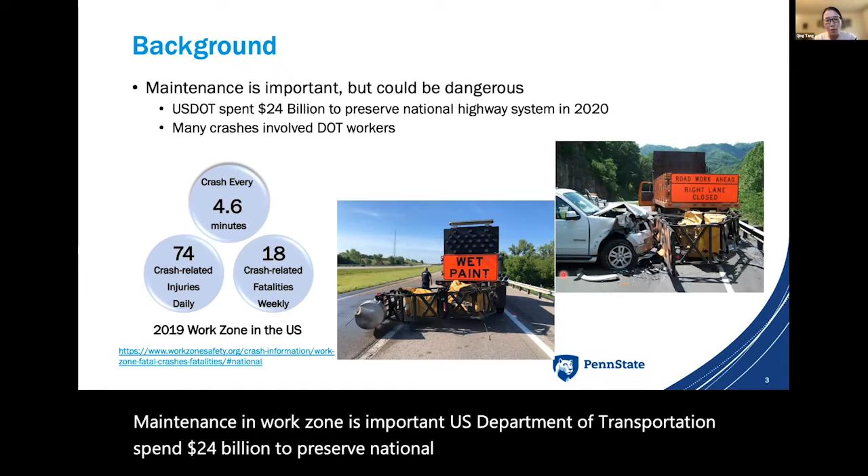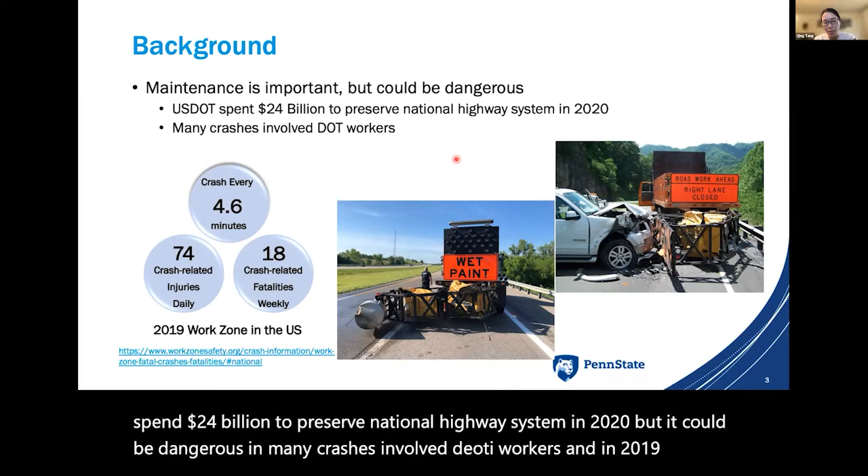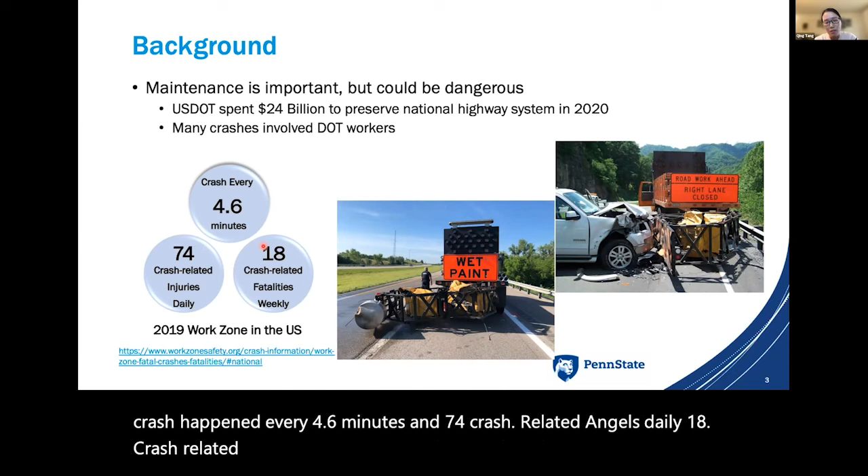Maintenance in work zones is important. The U.S. Department of Transportation spent $24 billion to preserve the national highway system in 2020, but it could be dangerous. Many crashes involved DOT workers, and in 2019, a crash happened every 4.6 minutes, with 74 crash-related injuries daily and 18 crash-related fatalities weekly. So how do we protect the lives of DOT workers?

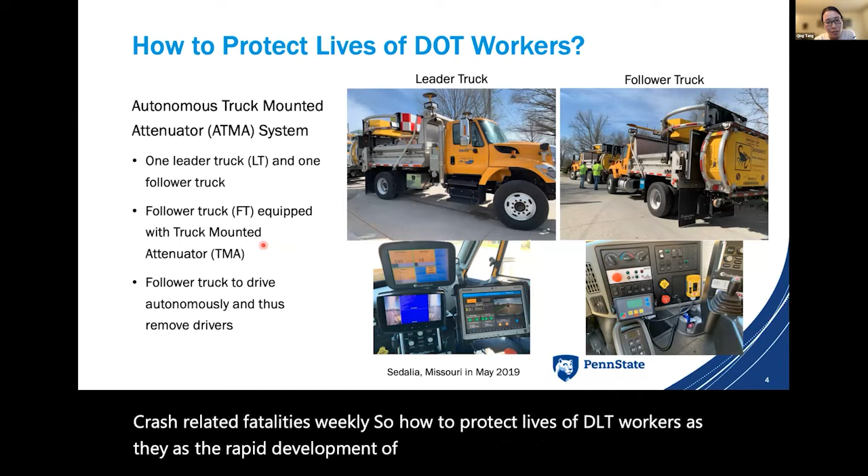With the rapid development of CAV technologies, many state Departments of Transportation tend to use the autonomous truck-mounted attenuator system to reduce fatalities of workers in work zones.

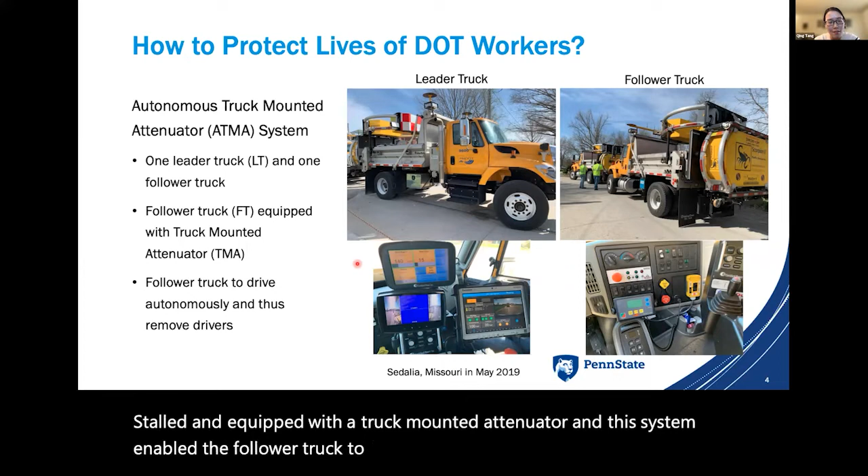One specific technology named autonomous truck-mounted attenuator system is being tested and deployed in several states. The system includes one leader truck and one follower truck, equipped with truck-mounted attenuators. This system enables the follower truck to drive autonomously, removing the need for a driver.

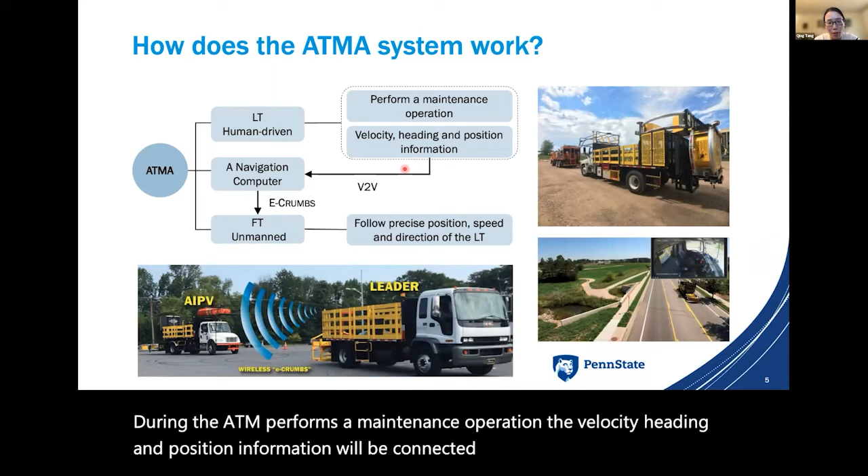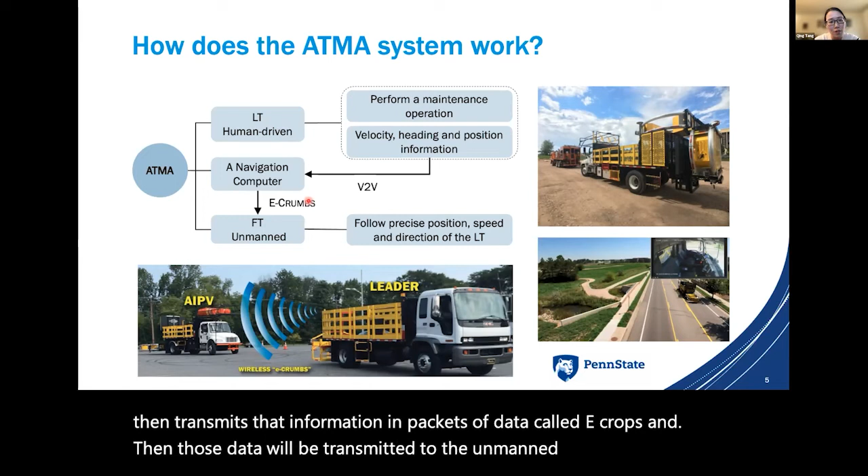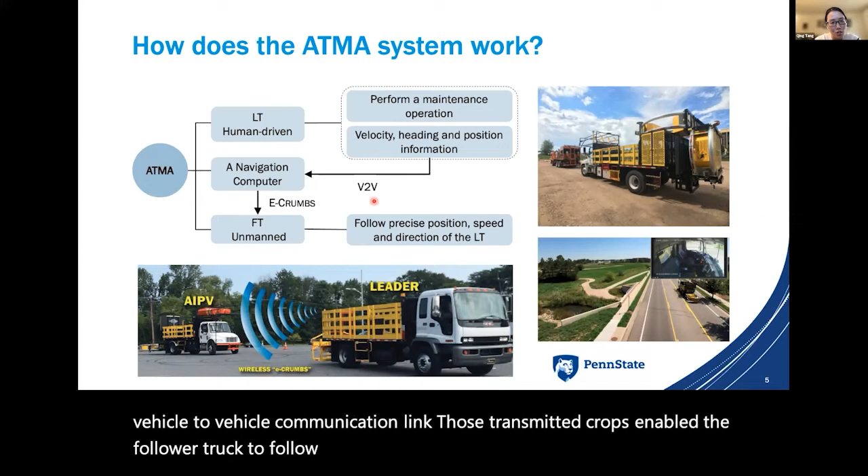During the ATMA maintenance operation, the velocity, heading, and position information are collected by a navigation computer and then transmitted as packets of data. Those data are transmitted to the unmanned follower truck over the vehicle-to-vehicle communication link, enabling the follower truck to precisely follow the position, speed, and direction of the leader truck.

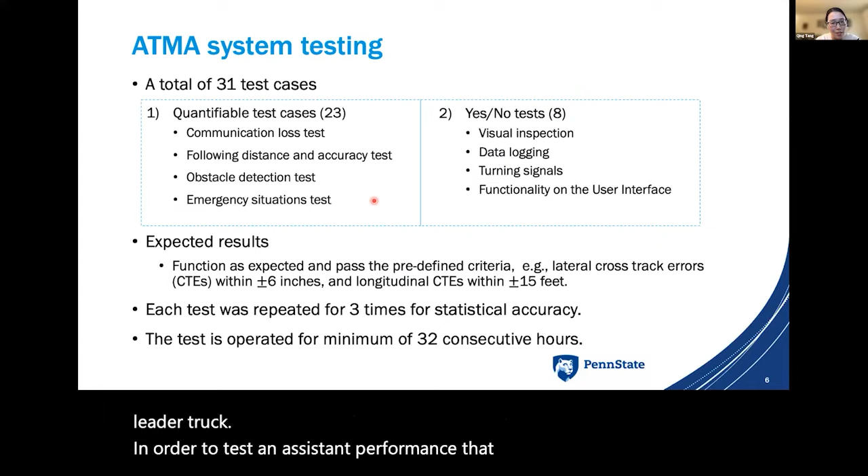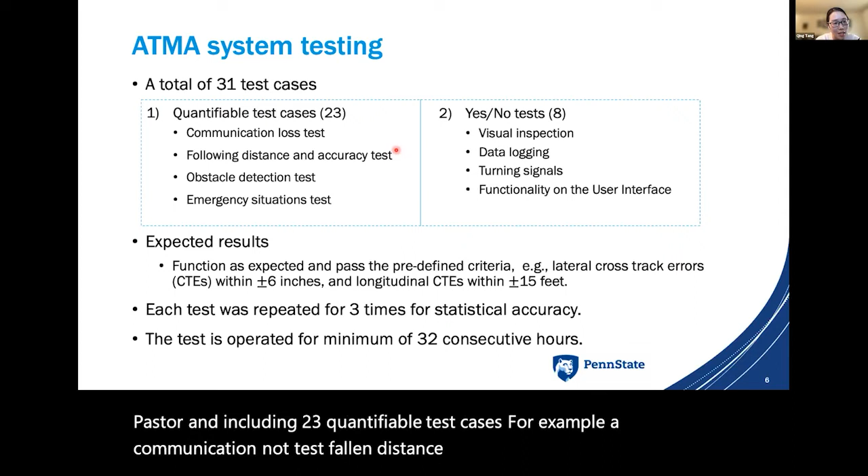To test the system performance, we check whether the system elements meet the predefined accuracy and functional requirements. A total of 31 test cases were designed, including 23 quantifiable test cases, for example communication loss test, following distance and accuracy test, obstacle detection test, and emergency situation test, plus 8 yes-or-no tests.

These yes-or-no tests include visual inspection, data logging, turning signals, and functionality of the user interface. Our expected results are that the system can function as expected and pass the predefined criteria.

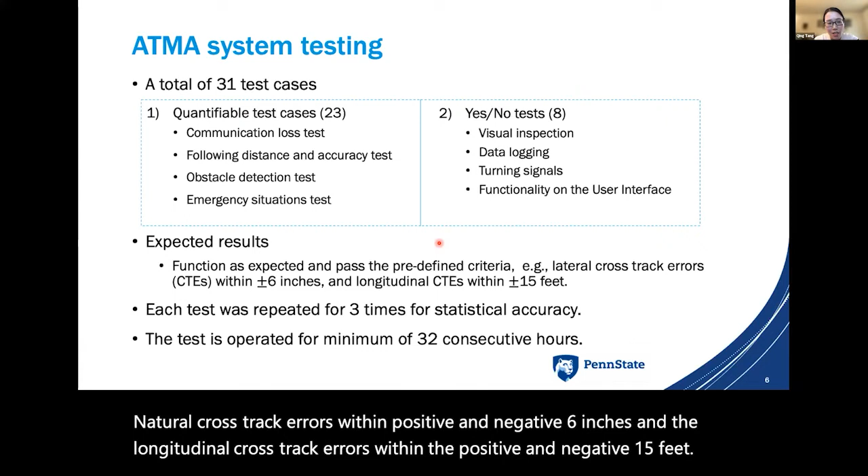For example, the lateral cross-track errors should fall within positive and negative 6 inches, and the longitudinal cross-track errors within positive and negative 15 feet. Each test was repeated 3 times for statistical accuracy, and testing was operated for a minimum of 32 consecutive hours.

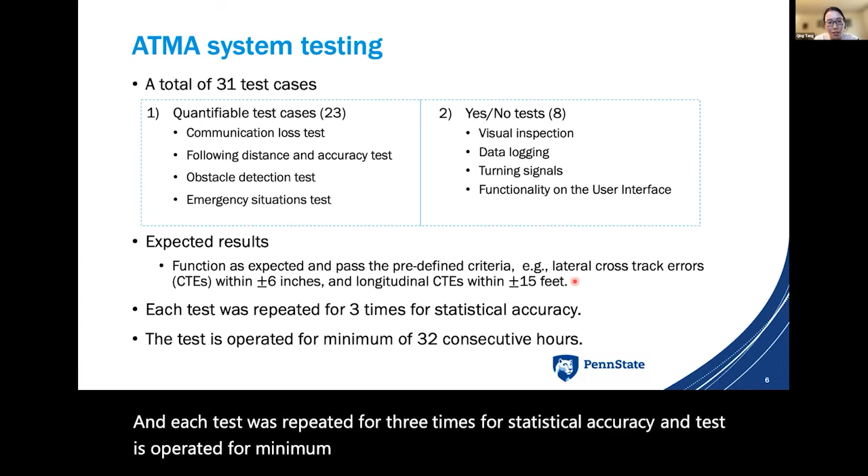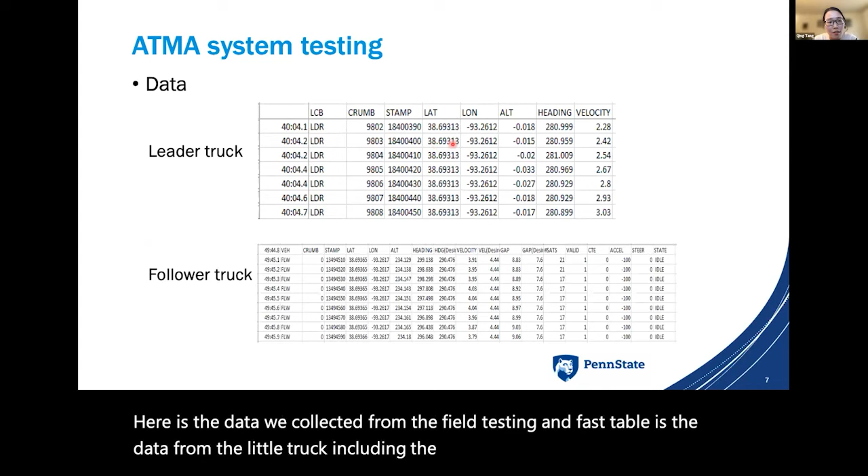Here is the data we collected from field testing. The first table shows data from the leader truck, including time and position location—latitude, longitude, and altitude—along with heading, distance, and velocity.

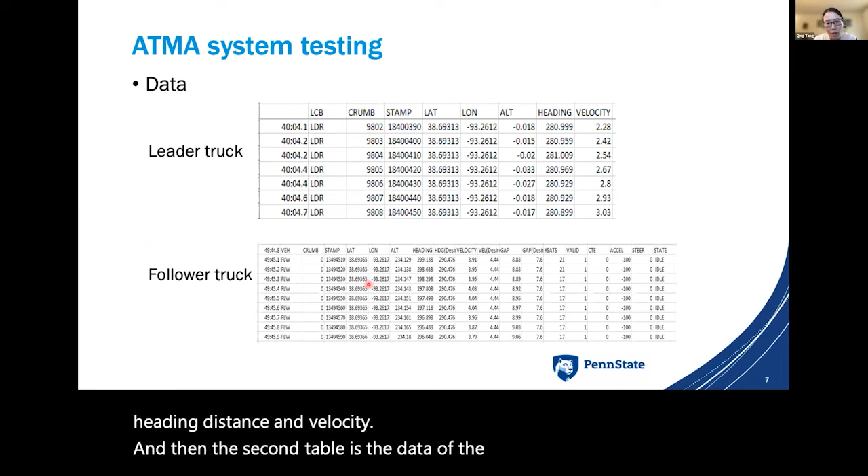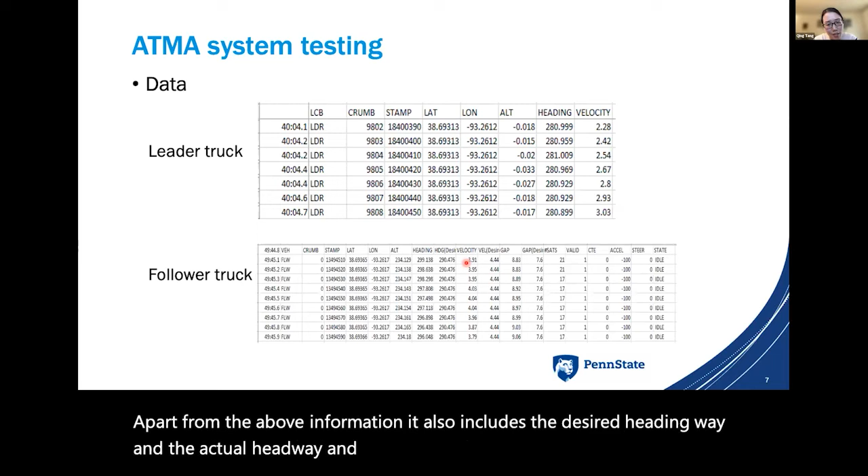The second table shows data from the unmanned follower truck. Apart from the above information, it also includes the desired headway and actual headway, the gap distance and desired gap distance, and velocity, etc.

For the quantifiable tasks, we needed to further analyze the cross-track errors to determine whether the tests passed or not. First, we looked at statistical characteristics of the cross-track errors, including mean value, standard deviation, and quantiles, to illustrate the system's overall performance compared with predefined criteria.

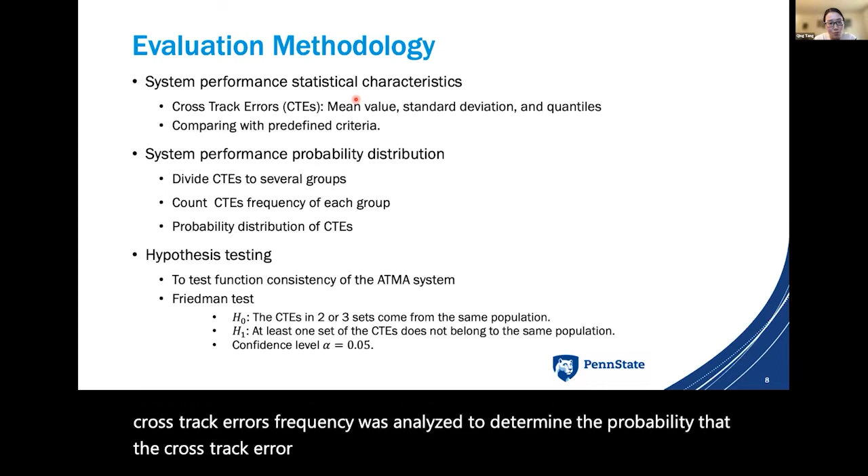We also expect the system to function stably each time, so its functional consistency needed to be tested. Based on the data collected for each test case, the probability distribution of the cross-track error frequency was analyzed to determine the probability that the cross-track error fell within a certain range. Then we performed a hypothesis test to prove the system could function consistently.

We chose the Friedman test, and we also chose a confidence level of alpha equals 0.05.

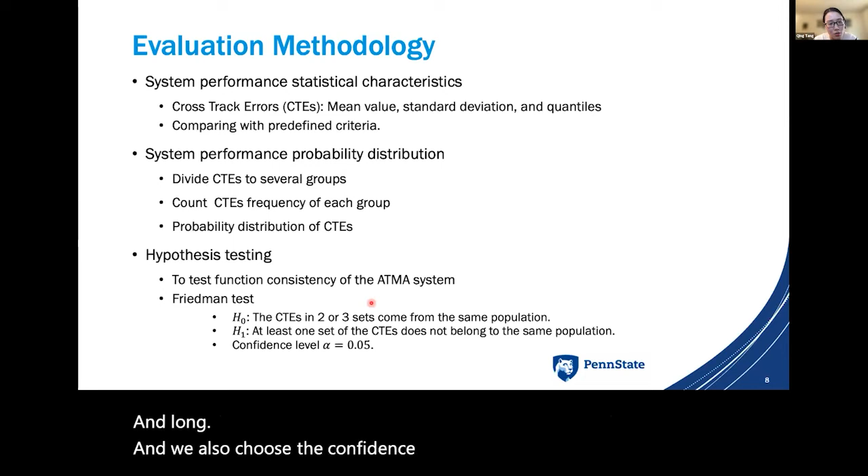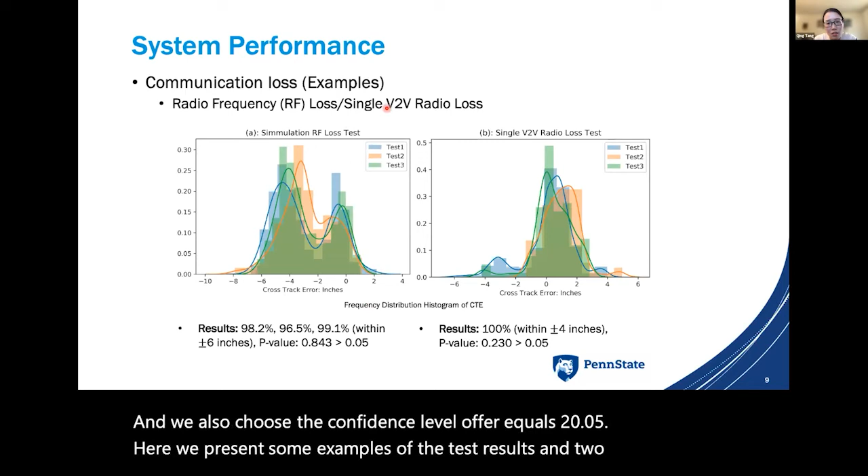Here we present some examples of the test results. Two test results of the communication loss test are shown here: one is the radio frequency loss test, and the other is the single vehicle-to-vehicle radio loss test.

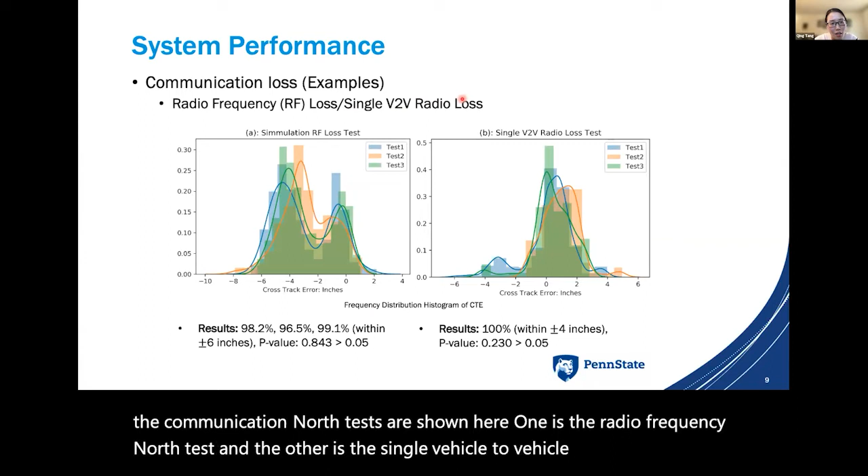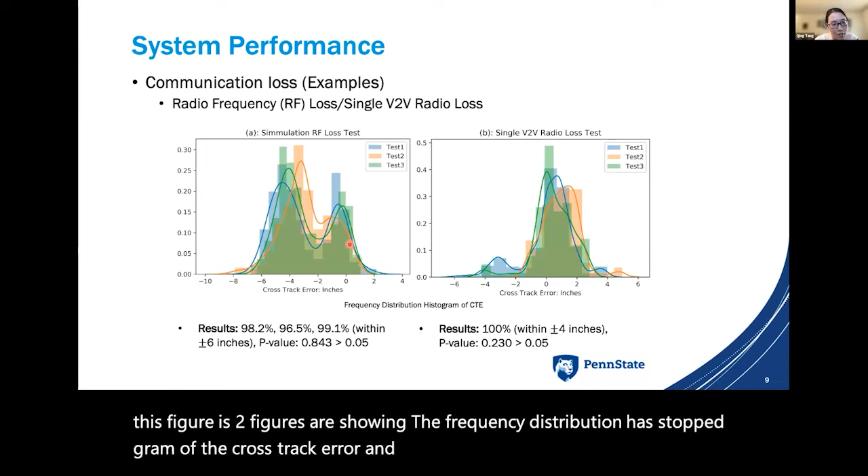These two figures show the frequency distribution histogram of the cross-track error, where the x-axis is the cross-track error in inches and the y-axis is the frequency.

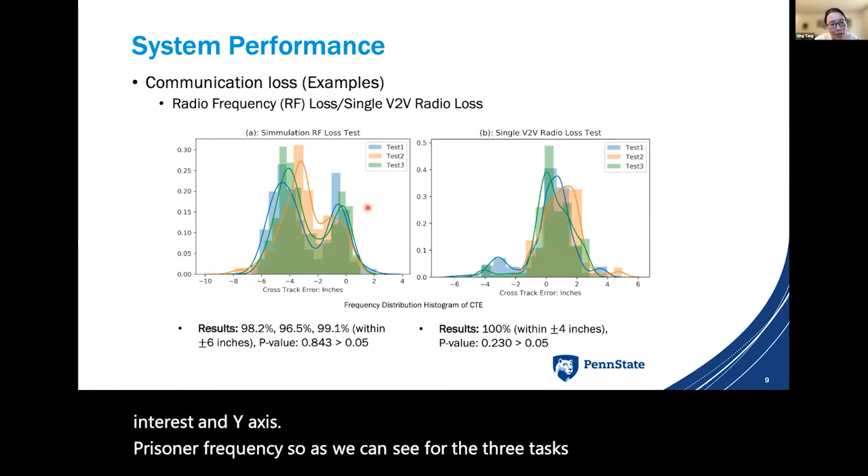As we can see, for the three repeated tests, more than 96.5% of cross-track errors are within positive and negative 6 inches, and the p-value is greater than 0.05, which means the results are consistent.

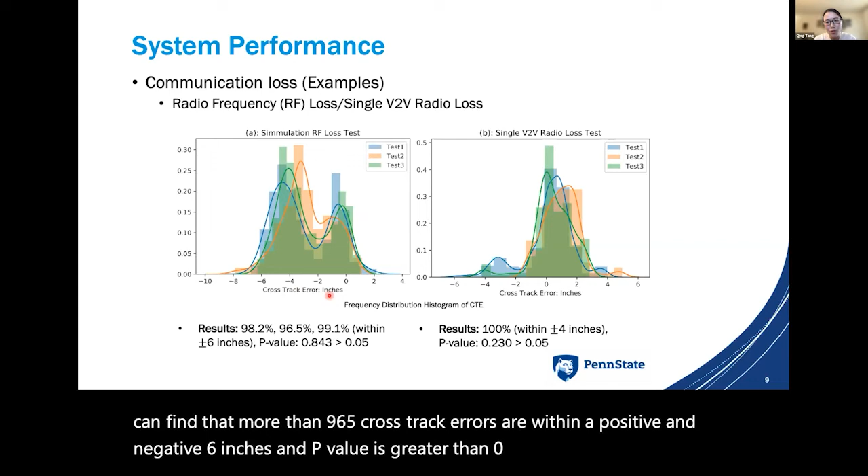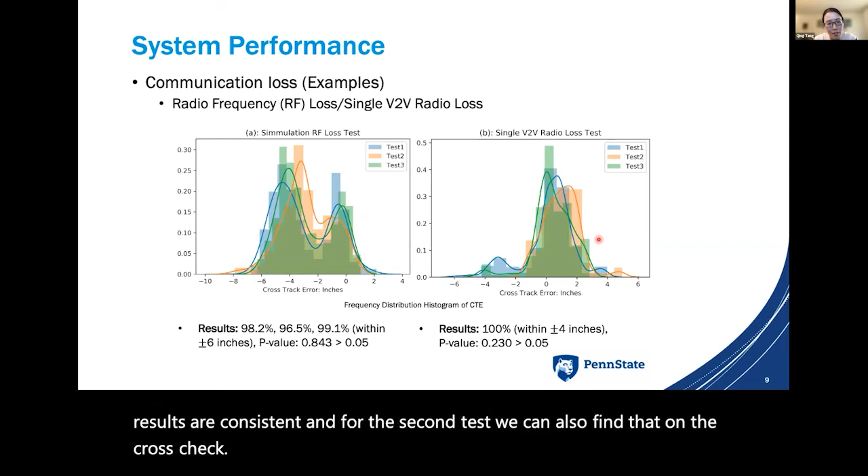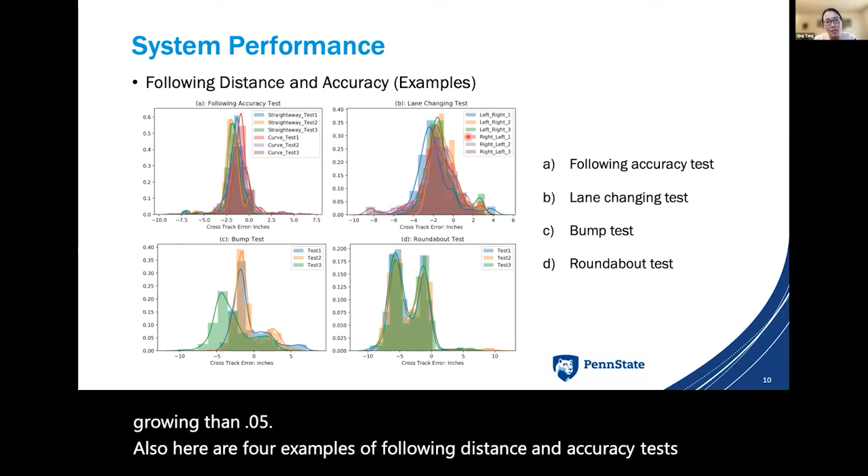For the second test, we can also find that all the cross-track errors are within positive and negative 4 inches, and the p-value is also greater than 0.05. Also, here are 4 examples of following distance and accuracy tests. We can derive that the tests passed and performed consistently.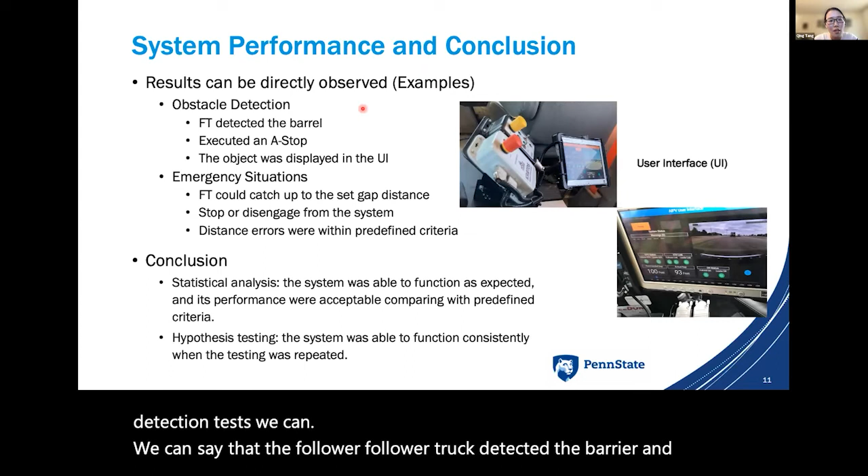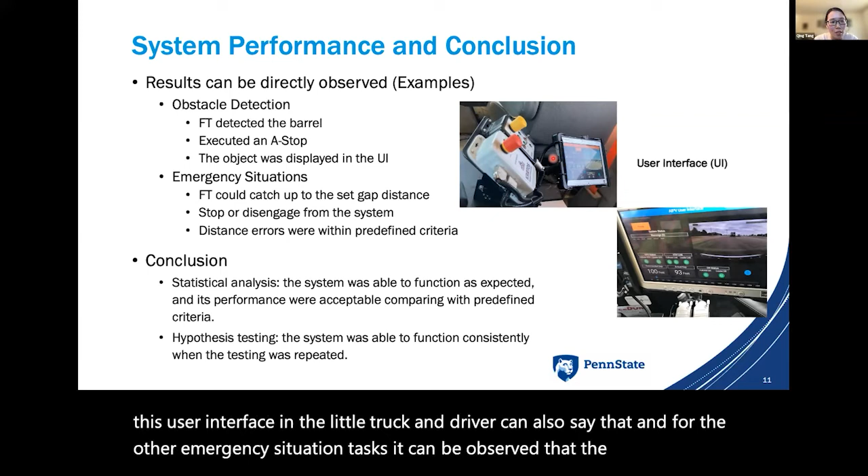Other test results can be directly observed. For example, in the obstacle detection tests, the follower truck detected the barrier and executed a stop, and the object detected was displayed in the user interface in the leader truck, so the driver could also see that. For the other emergency situation tests, the follower truck could catch up to the set gap distance and stop or disengage from the system, and the distance errors were within our predefined criteria.

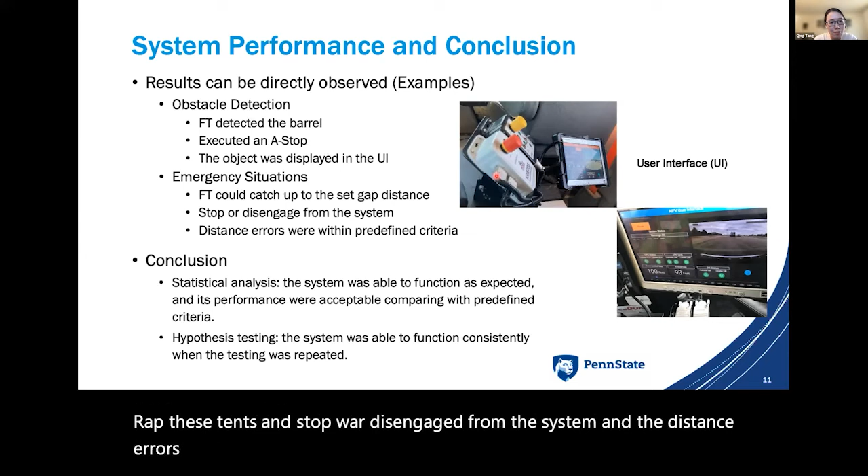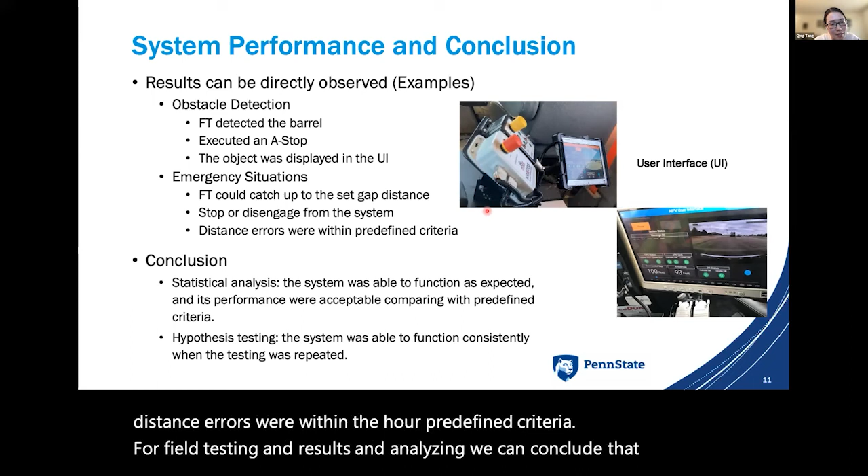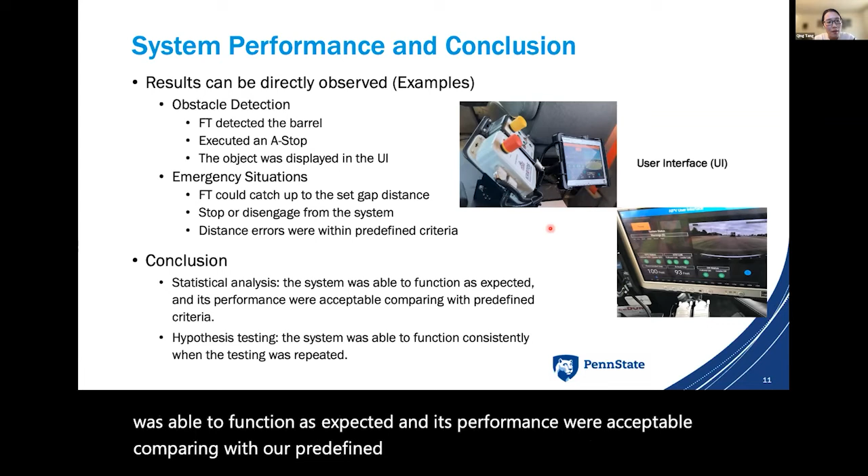So for field testing and results analysis, we can conclude that the ATMA system was able to function as expected, and its performance was acceptable compared with our predefined criteria. Through the hypothesis testing, we also found that the system was able to function consistently when the testing was repeated.

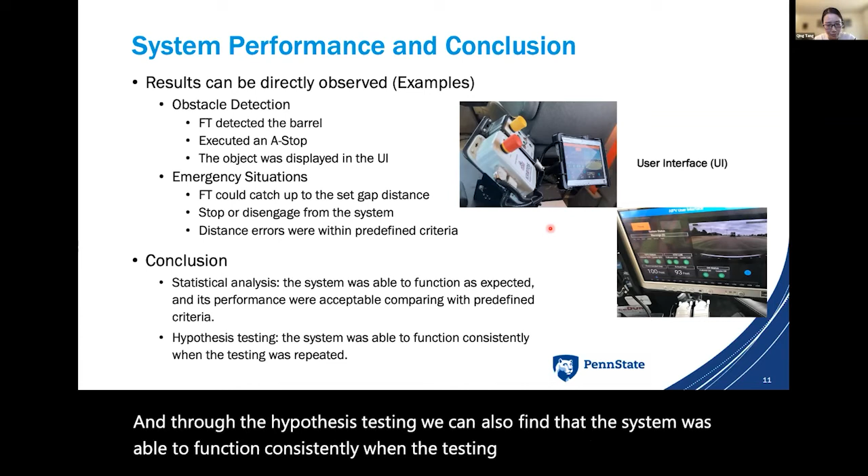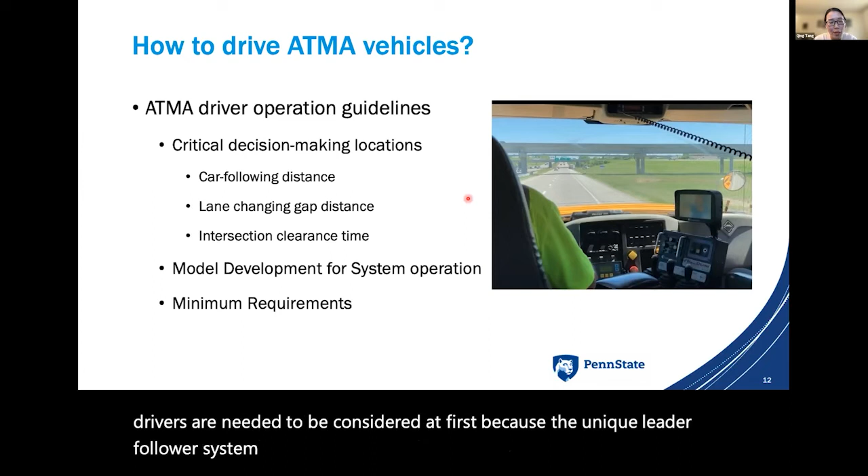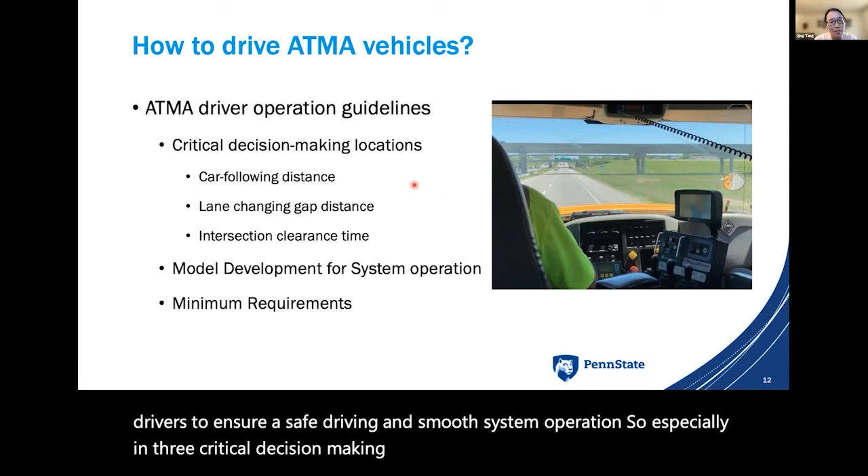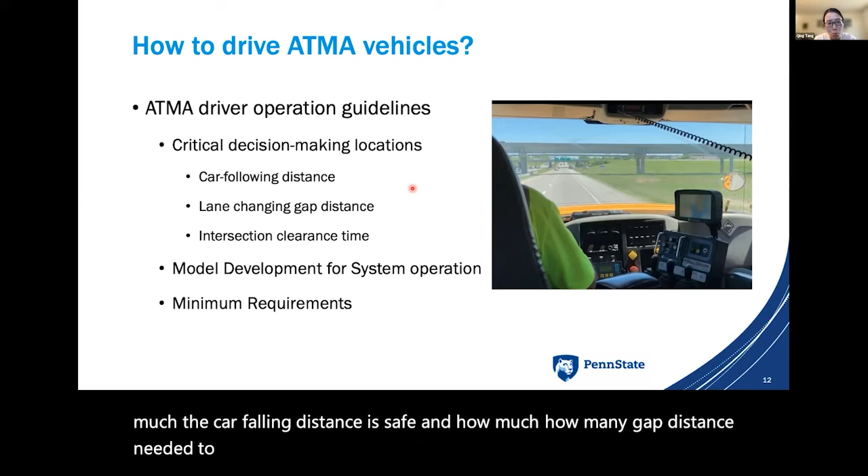Before the ATMA system is applied in work zones, operation guidelines for drivers need to be considered first, because the unique leader-follower system design imposes more requirements on our leader truck drivers to ensure safe driving and smooth system operation, especially in three critical decision-making locations: car-following, lane changing, and the intersection. We need to define how much car-following distance is safe, how much gap distance is needed to make a lane change, and how much clearance time the system needs to cross an intersection or make a left turn.

So next, the model will be developed to determine the minimum driving requirements for the leader driver.

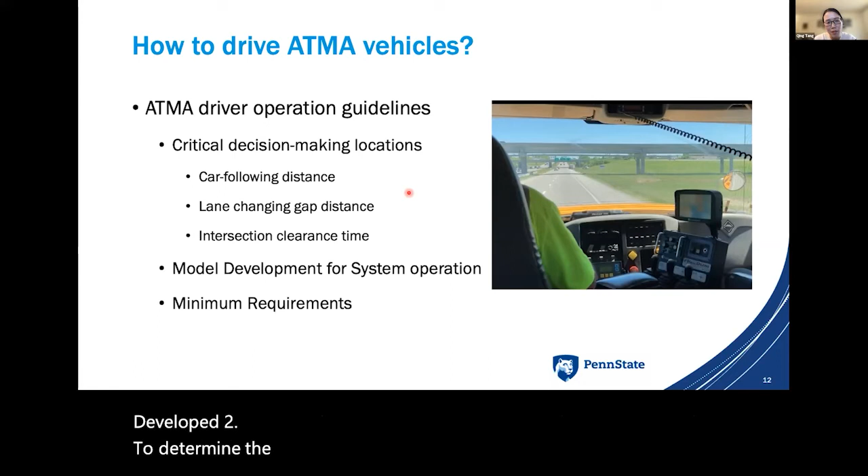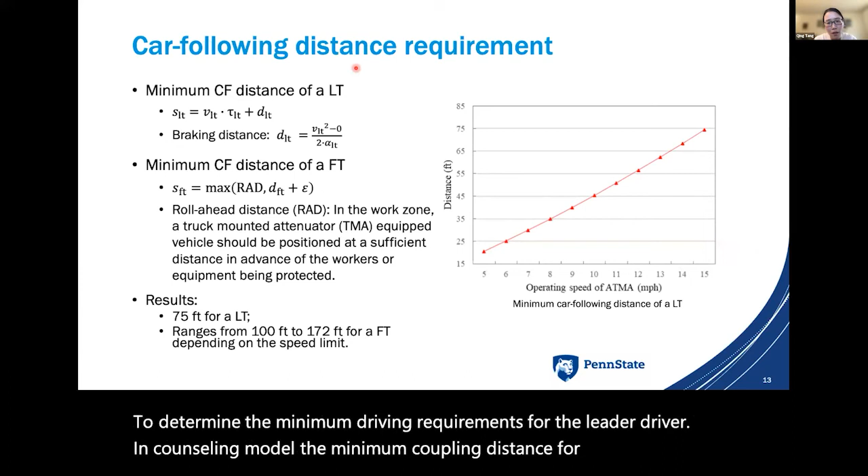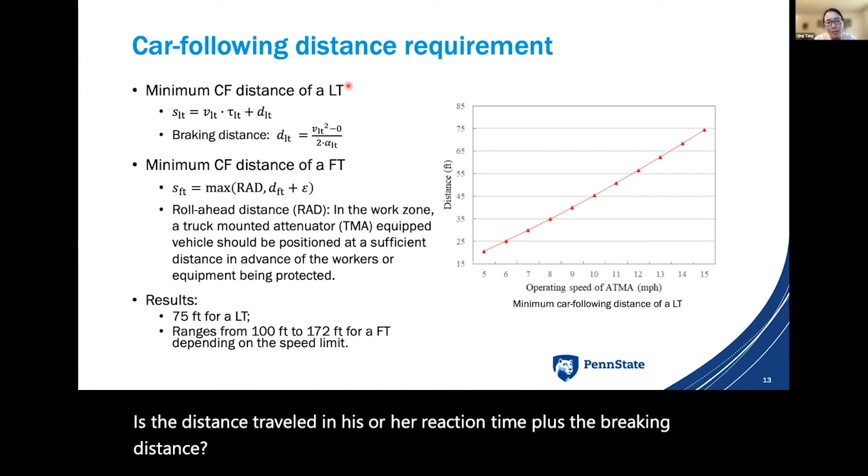In the car-following model, the minimum car-following distance for the leader truck is the distance traveled in his or her reaction time plus the braking distance to ensure safety. Since the follower truck is unmanned, there is no reaction time, but we need to consider system error, and also the roll-ahead distance.

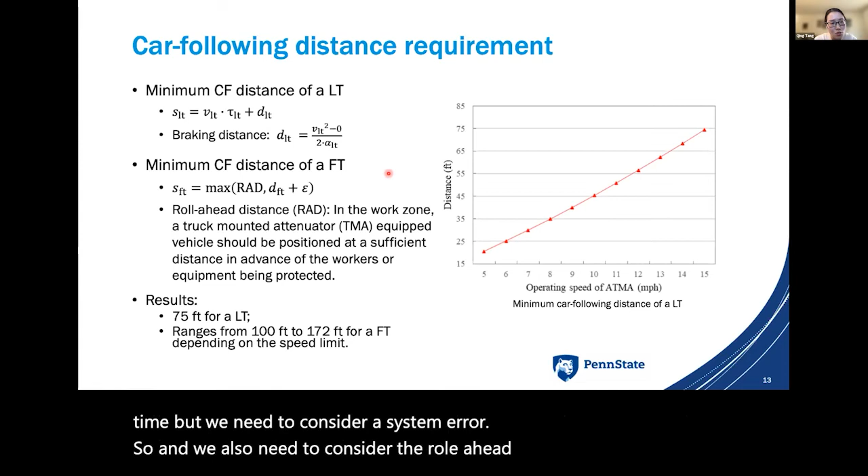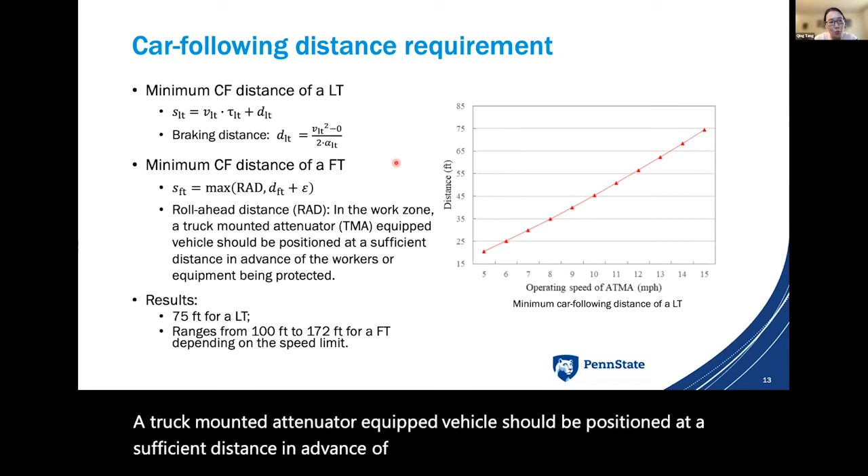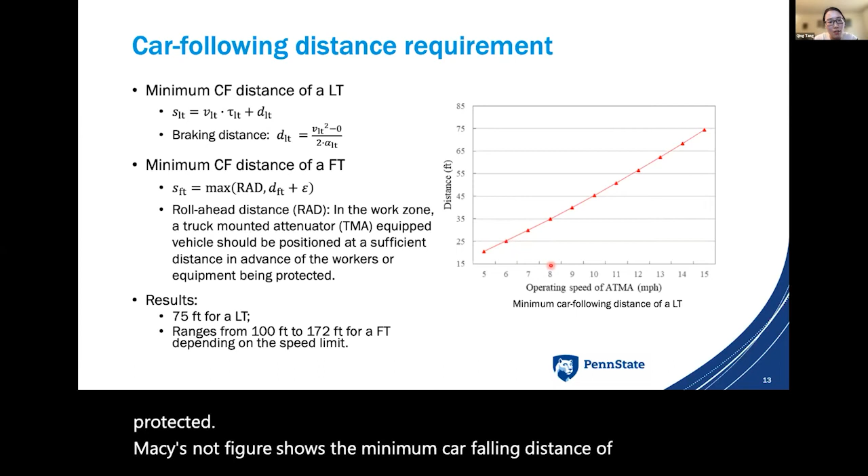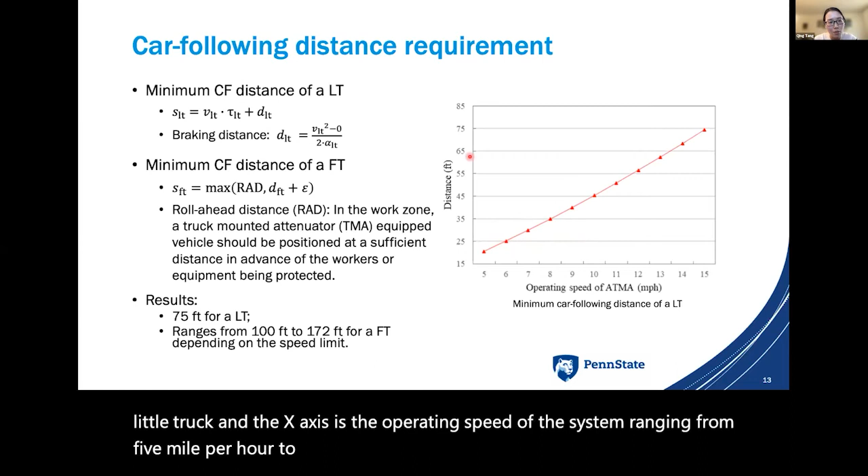In the work zone, a truck mounted attenuator equipped vehicle should be positioned at a sufficient distance in advance of the workers or equipment being protected. This figure shows the minimum car-following distance of a leader truck, with the x-axis showing the operating speed of the system ranging from 5 to 15 miles per hour, and the y-axis showing distance in feet. We find that the minimum car-following distance for the leader truck is 75 feet.

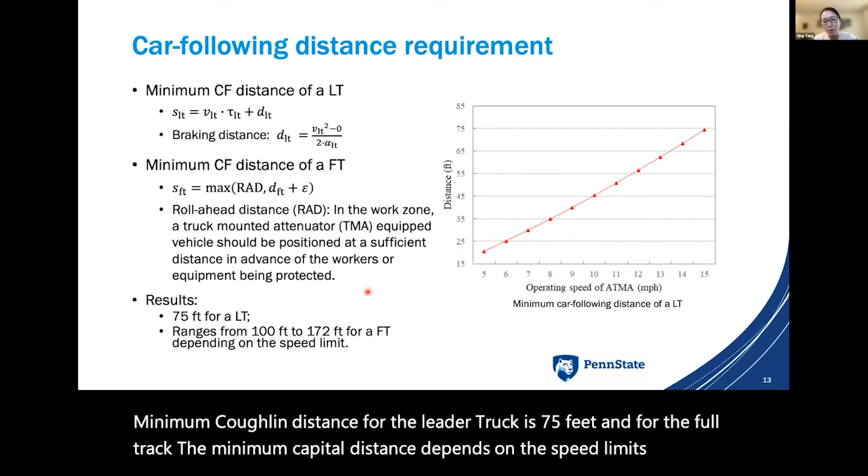For the follower truck, the minimum car-following distance depends on the speed limit, which determines the roll-ahead distance, so it ranges from 100 feet to 172 feet.

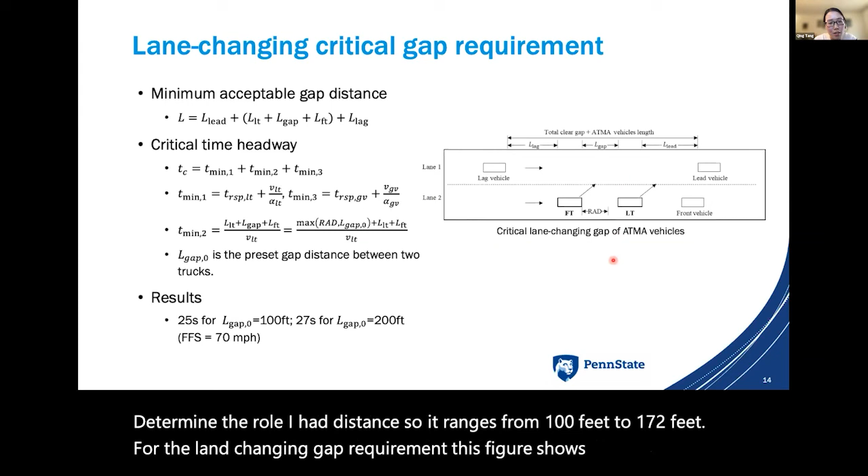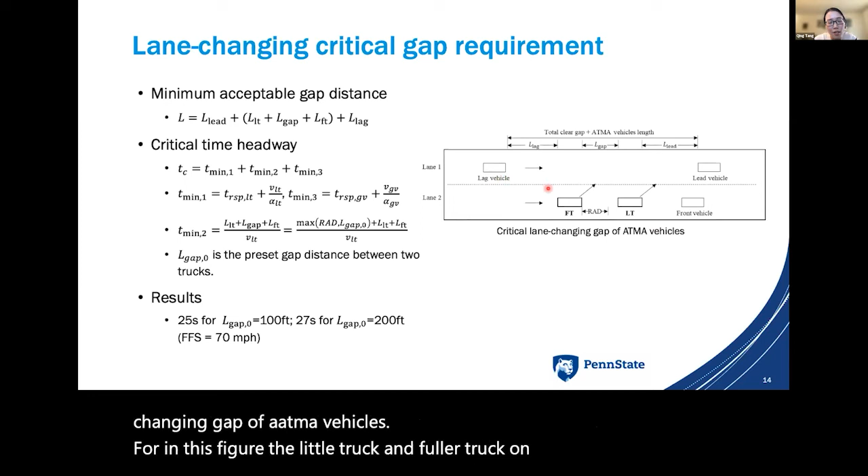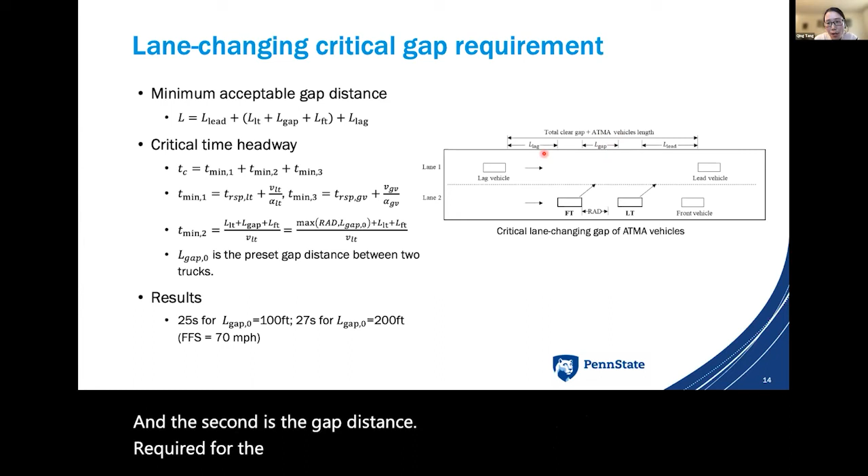For the lane changing gap requirement, this figure shows the critical lane changing gap of ATMA vehicles. The leader truck and follower truck are on lane 2 and would like to change lane to lane 1. So for the leader truck, the total gap distance includes three components: the leader gap distance for the leader truck, the gap distance required for the follower truck to switch lanes, and the lag gap distance for the lagging general vehicle on the target lane.

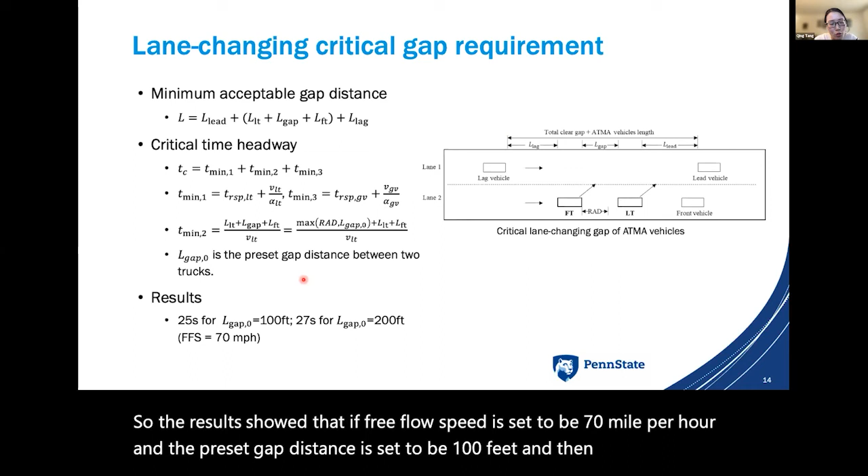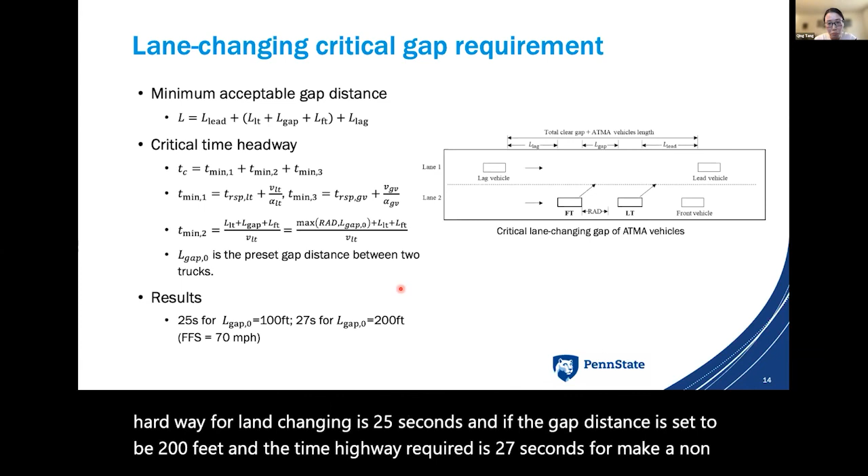Those three components also correspond to three critical time headways. The results show that if free flow speed is set to be 70 miles per hour and the preset gap distance is set to be 100 feet, the critical time headway for lane changing is 25 seconds. If the gap distance is set to be 200 feet, the time headway required is 27 seconds to make a lane change.

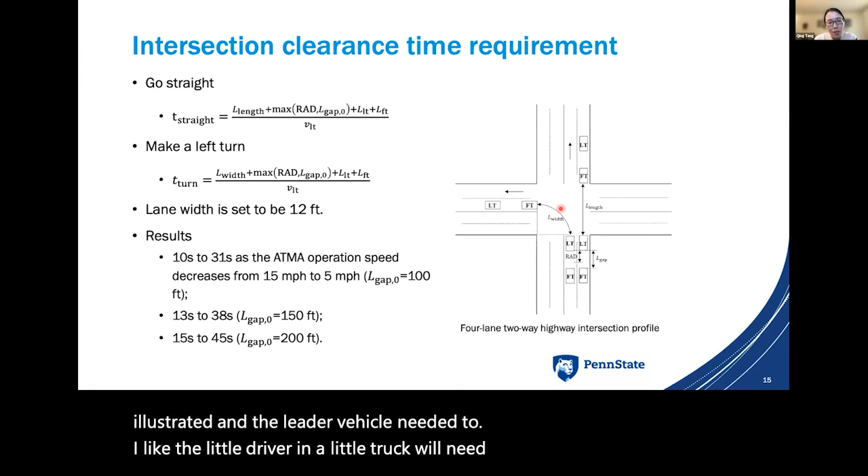At the intersection, we need to decide the minimum clearance time for both trucks to cross, go straight at the intersection, or make a left turn. In this figure, a specific 4-lane, 2-way highway intersection profile is illustrated, and the leader driver in the leader truck will need to decide whether the remaining green time is enough for both trucks to make a left turn or cross the intersection.

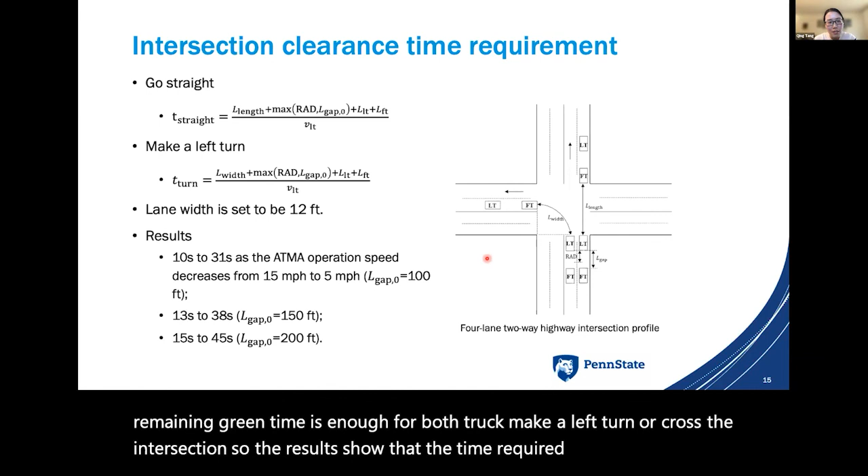The results show that the time required for crossing the intersection or making a left turn are almost equal, because the lane widths and the intersection lengths are almost the same.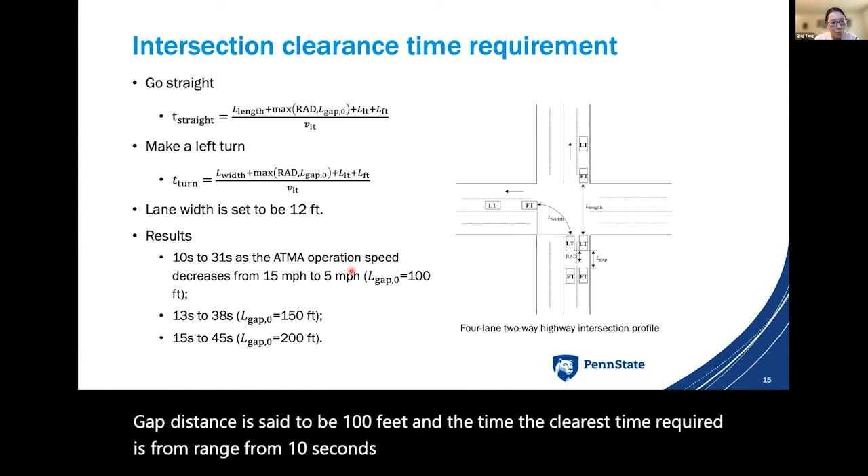So when the gap distance is set to be 100 feet, the clearance time required ranges from 10 seconds to 31 seconds, and as the gap distance is increased, the time will also increase correspondingly.

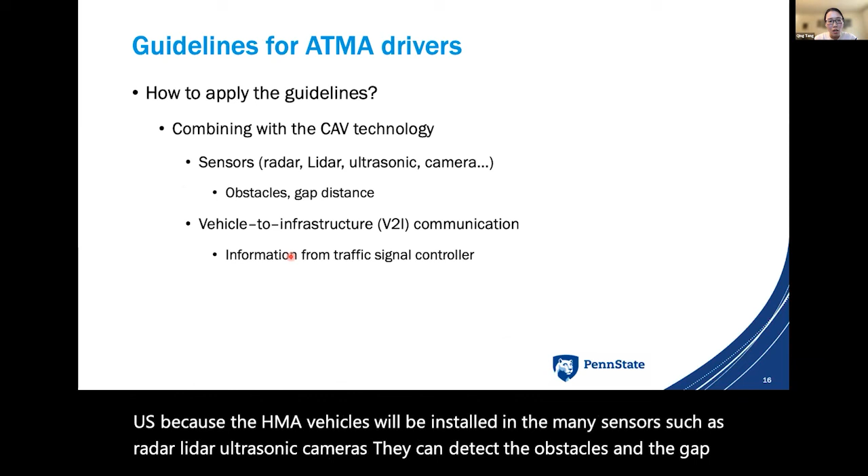After that, combining with connected autonomous vehicle technology, we can apply the guidelines to the work zone. Because the ATMA vehicles will be installed with many sensors such as radar, LiDAR, and ultrasonic cameras, they can detect obstacles and the gap distance. Also applying vehicle-to-infrastructure communication, information from the traffic signal controller will be provided to the driver, so they can decide whether the clearance time at the intersection is enough or not.